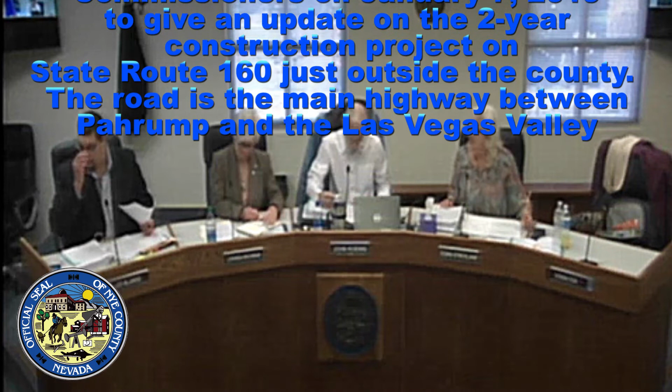10:15, presentation by Nevada Department of Transportation regarding the highway construction mess on State Route 160 from Clark County line extending 28 miles east towards Las Vegas.

I can hear the explosions from here.

My name's Don Christensen. I'm the resident engineer for this construction project, and Mario Gomez is also with me. He's the assistant district engineer over construction for District 1 for NDOT. So this project runs from approximately 5 miles west of Blue Diamond Road to about a mile west of the Nye County, Clark County line.

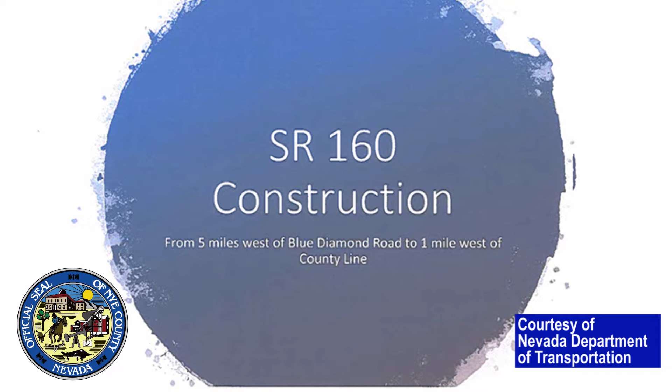And so there's actually two projects that are combined into one contract, and both of them will be done concurrently. The total cost of this contract is $59 million, and it's roughly 2 years in duration. We started in September of 2018 and will extend into July of 2020. The total length of the work is 27.5 miles.

And so there's two kind of distinct parts of this project. Just for clarity, one of them is what I call the mountainous area, which is through the mountainous area past Mountain Springs and down to the other side. And then the other one I call the roadbed modification area, which is basically where the highways divide heading towards Pahrump, and then extending from there all the way for 22 miles, a little bit past the Nye County line.

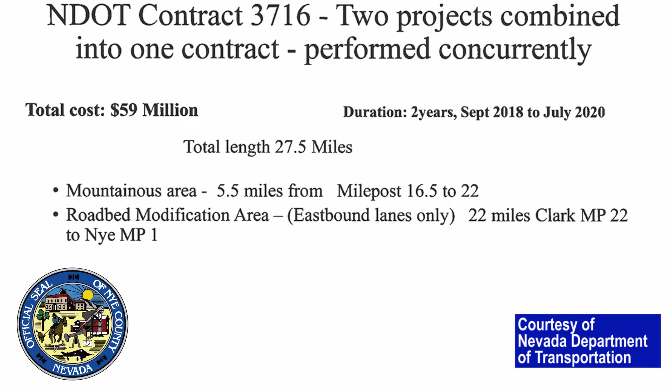So first off, in the mountainous area, this will be 2 years of duration on this work, and it's mainly a complete rebuild of the highway. And the purpose is to improve safety, efficiency, and access for the residents and for commuters. This part of this highway has been known to have a lot of accidents, including a lot of fatal accidents.

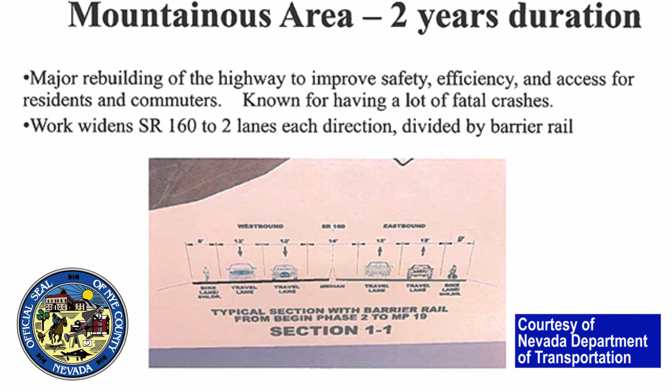So this is a needed project, and it'll include basically realigning the curves, dividing the two directions with a barrier rail, and a lot of other safety upgrades to bring it up to current standards. So you can see in the diagram kind of a cross-section of what the new highway will be, and it also allows for passing of slow vehicles up in the upgrades and that sort of thing.

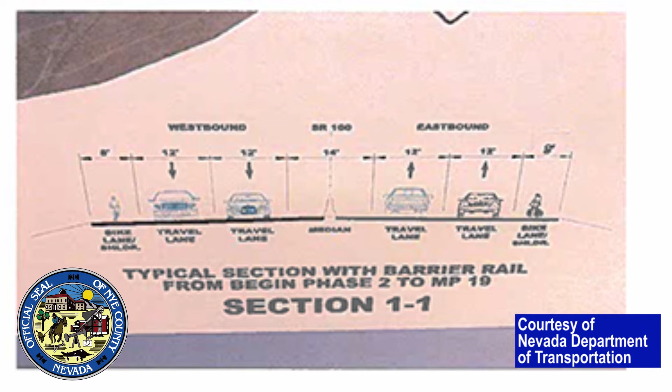Also, part of the work will be in the Mountain Springs community itself. We'll be adding these frontage roads to kind of collect the resident traffic and bring them into the highway at selected points. And there are some other design features there to improve the safety of that area.

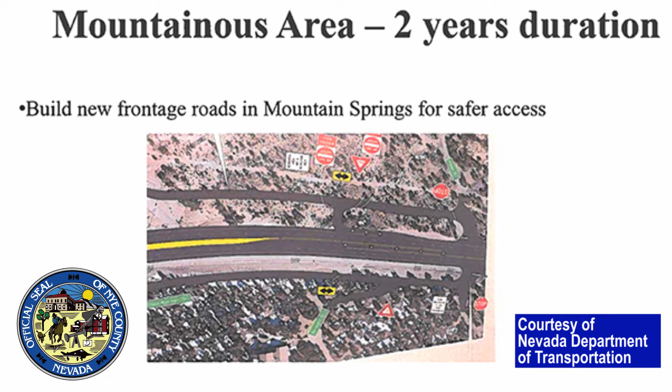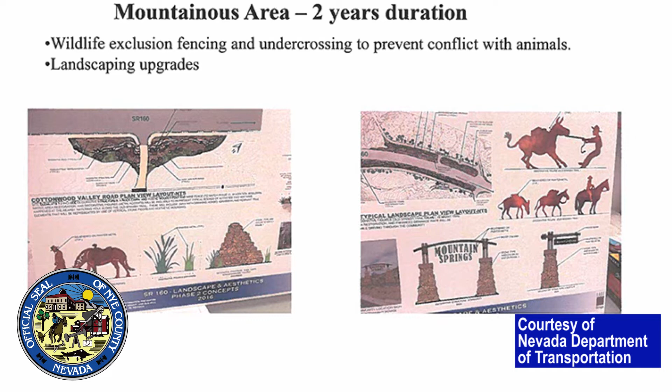The other thing is that this project will have wildlife exclusion fencing, and there'll be an undercrossing bridge to keep the desert bighorn sheep, the burros, deer, and elk from being hit, and also to protect them from being killed. So through the mountainous area, there will be the wildlife exclusion fencing, except when you get to the Mountain Springs area, then it's not there anymore, and it's not on the other part.

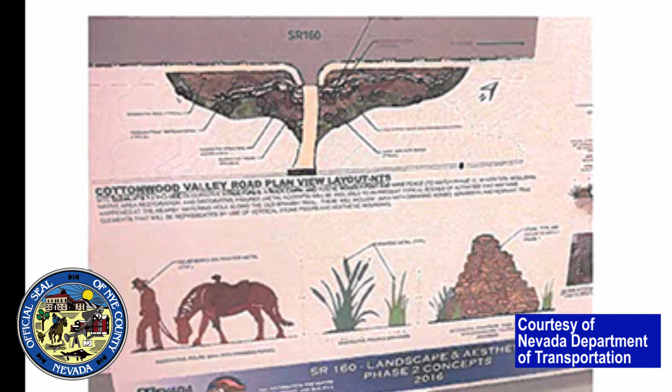There will also be a fair amount of landscape upgrades, which you can see some examples of on the slide. We did salvage more than 1,700 cactuses and yuccas that are going to be transplanted into the project, and for the trees that are being removed, we're going to plant over 700 juniper and mountain mahogany and those kind of trees, although they're just little ones, so it'll take a while to really see them growing.

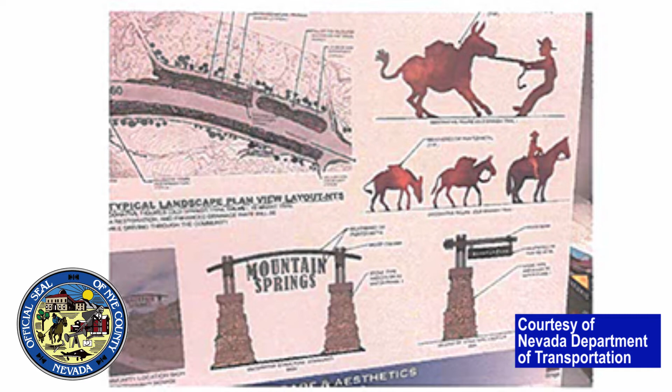So now the other area, the roadbed modification area, that's where it's divided now. That is going to be roughly starting this month and then going for about 11 months. We're hoping it'll be done by then. It'll be mainly on the eastbound pavement. The westbound is in good condition. There's no work planned there.

The eastbound paving is failing, and those that drive it may have noticed the bad cracks, and it was in danger of a bad failure, and so that's why we're combining these two projects and doing them at the same time, because it's very much needed. That road will be repaired full depth, doing a roadbed modification.

And so what a roadbed modification includes is basically pulverize the existing pavement 12 inches deep, add cement, and then compact it to make an 8-inch thick stabilized base. And then we'll put back 6 inches of new asphalt surfacing and 3/4 inches of open graded surface course.

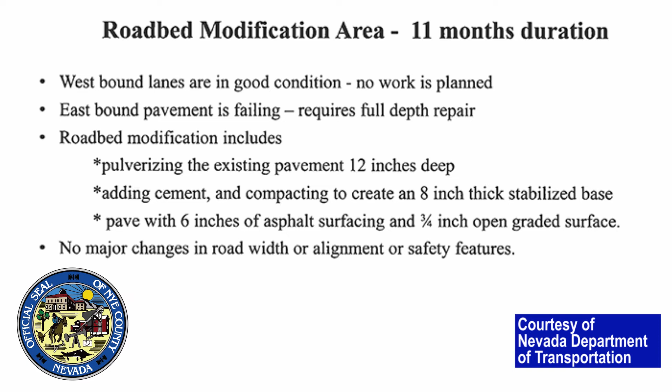It's basically a paving upgrade. It's not really changing the alignment or much of any of the safety features. It's just rehabbing the pavement for that 22 miles. So that's basically the scope of what's going to be done. What I wanted to talk about is the impacts to the traveling public during construction.

So in the mountainous area, right now, lanes are restricted to one lane in each direction. The 2 lanes are separated by barrels. There is temporary concrete barrier rail separating the travel lanes from the work zones. The speed limit right now is 35 miles an hour in the Mountain Springs area, 45 miles an hour down on the eastern part of the job. In fact, the speed limit before this project was 55. In the Mountain Springs area it will be reduced to 45 permanently.

So the possible delays include the contractor is allowed to stop traffic for 20 minutes at one time, with a 30-minute total delay getting through the work zone. That could happen due to flaggers or pilot car. The one exception is during blasting. The blasting delays can be longer, up to 2 hours, and there could be up to 2 blasts per day, although it's not normally like that. I'll explain that a little bit more in the next slide.

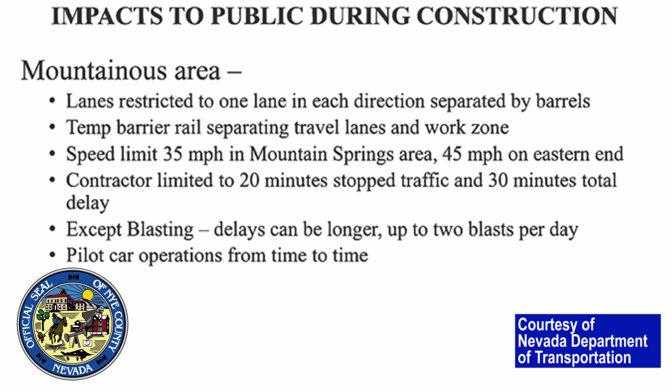There are also from time to time pilot car operations, where sometimes you have to wait for a turn to go through the work zone following a pilot car. That will normally be limited to 20 minutes of stopped traffic with a 30-minute total delay. For the blasting, in normal conditions it will be 2, maybe 3 times per week, and normally we've been having them always at 12:45 p.m.

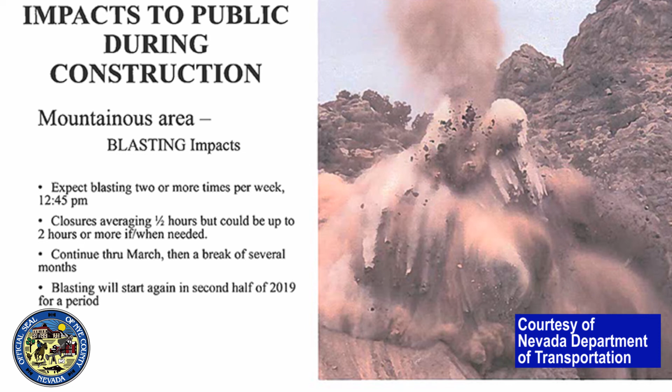And we have been spreading the word through the message boards along the highway, the DMS signs, and also through our community outreach from our public information officers, on the website, and we spread the word as wide as we can each time. So those of you that drive it may have noticed that.

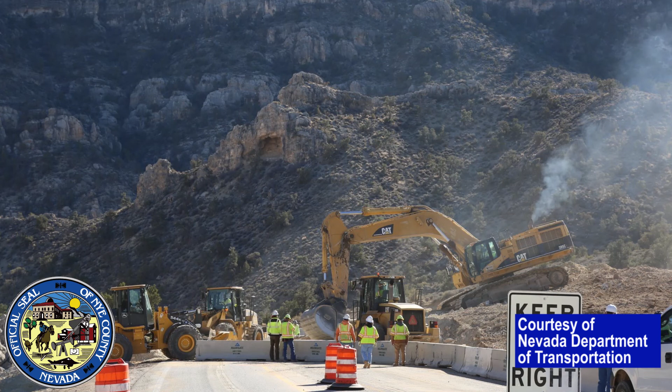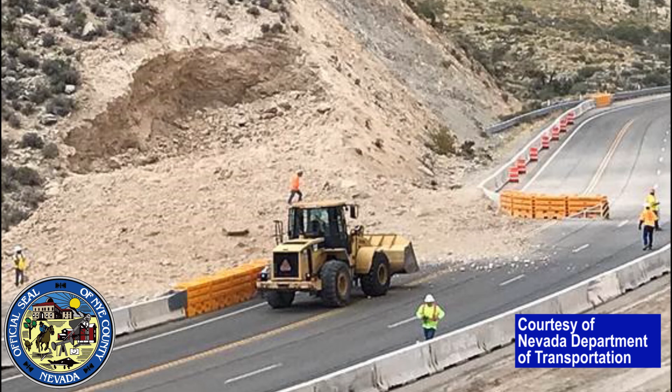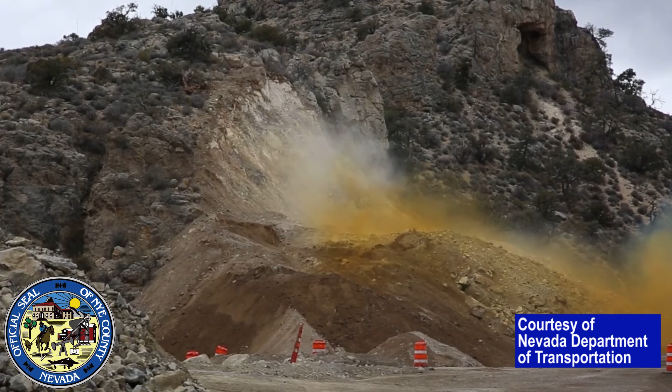Most of the closures that we've had to date have been about a half an hour, but some are longer, and it could take as much as 2 hours, maybe even more. If a lot of rock gets on the road, it's however long it takes to clean it off and get the road reopened. We'll be continuing to blast from now until about March, 2, maybe 3 times a week, possibly even more. It's up to the contractor. He's allowed to blast every day if he wants, but he's been going 2 to 3 days per week. They'll be pretty much done with that phase roughly in March, and then there'll be a break for several months, and then we'll start blasting again for the next phase later in the year.

For what we call the roadbed modification area, the impacts to the public will be on that road. It's about 22 miles, so we'll be dividing it into 3 phases, 7 to 8 miles each phase. During each phase, all of the traffic will be shifted to the westbound lanes, 1 lane in each direction, while the work is being done on the eastbound lanes for that same 7 to 8 mile section. There'll be a crossover to get the traffic across.

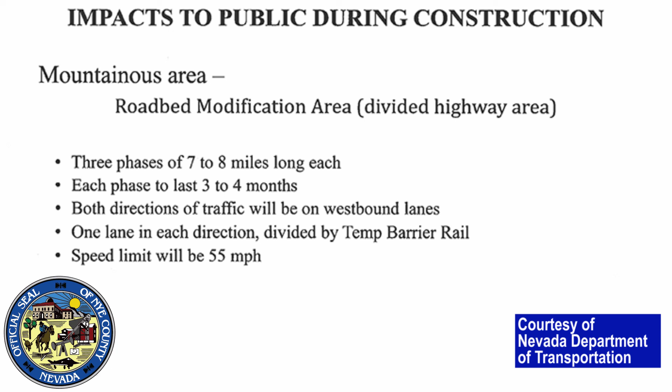Each phase will probably be 3 to 4 months long, and as I said, all of that traffic will be on the westbound lanes. On those lanes, the traffic will be divided by a temporary barrier rail, and the speed is reduced to 55 miles an hour from the current 70.